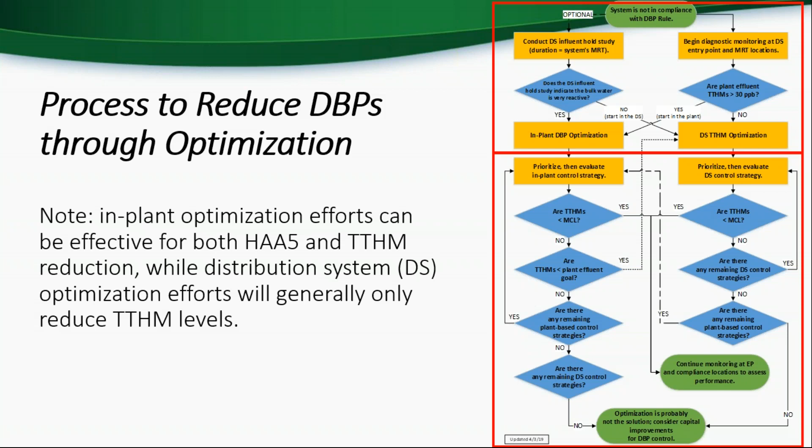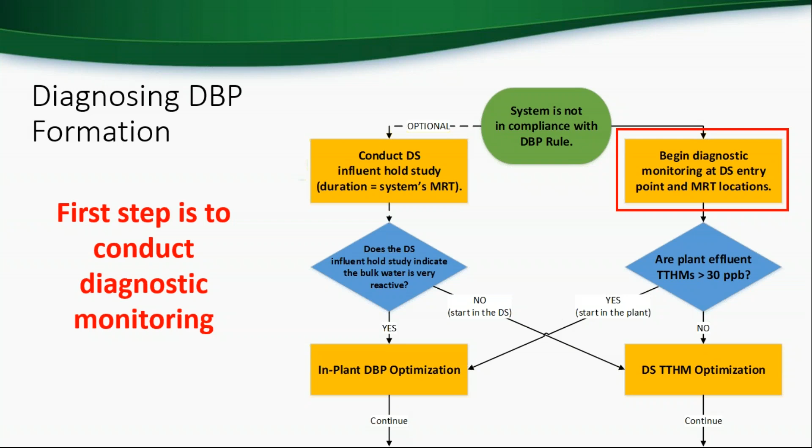The first step in diagnosing DBP formation is to conduct diagnostic monitoring studies. This consists of collecting a DBP sample from the distribution system entry point and the maximum residence time locations to determine where the majority of DBP formation is occurring.

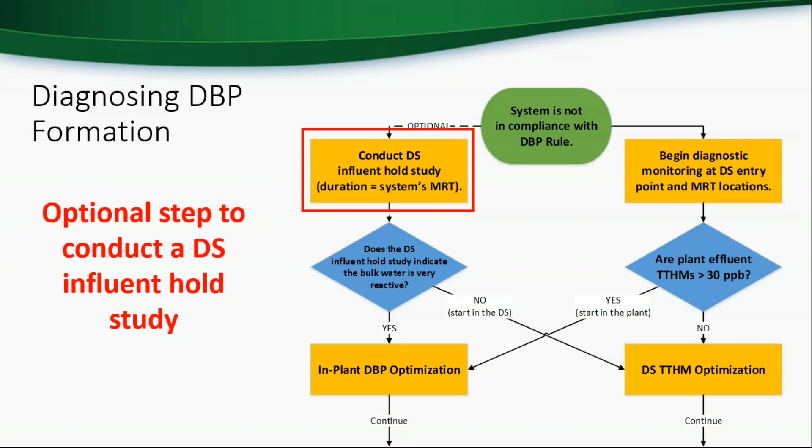In addition to the diagnostic monitoring study, an optional initial step is to conduct a distribution system influent hold study. Conducting this study may provide additional information related to disinfectant stability and DBP formation.

Based on our experience and feedback from state drinking water programs, we suggest that systems initially focus on in-plant optimization approaches if plant effluent THM levels are greater than 30 parts per billion. Similarly, if the plant effluent HAA5 concentration is greater than 20 parts per billion, we suggest they focus on treatment optimization. Keep in mind these are just guidelines and may not apply to all systems.

If a system determines that they need to start with treatment optimization, the primary areas of focus are optimizing their oxidation and disinfection process and DBP precursor removal. These topics will be covered in more detail later in this webinar series.

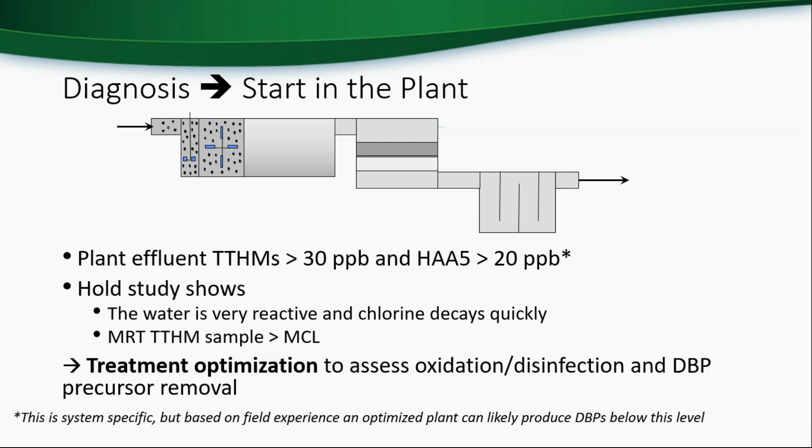The focus of today's webinar is prioritizing DBP optimization control strategies in a water treatment plant. This will include reviewing historical water quality data, in-plant monitoring using a DBP surrogate, and approaches to evaluate the effectiveness of potential control strategies. So this concludes the introduction portion of the webinar.

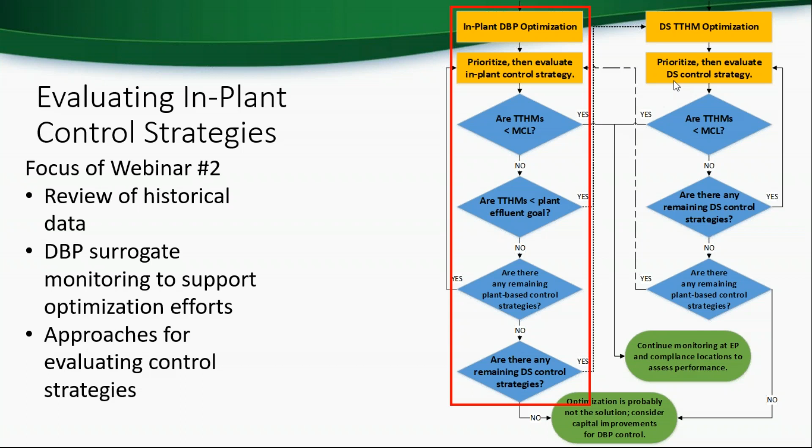Now Allison Dugan from US EPA is going to provide a presentation on how to review historical water quality data to prioritize DBP optimization control strategies in a water treatment plant.

Great, thanks, Matt. As Matt said, today I'm going to talk about the data that are often considered when prioritizing DBP control strategies. And before I get into this, I really want to give some credit to the states of Alabama and Kentucky, who have water systems that provided data that we will be highlighting today. So thank you very much. It provides for some great examples for our discussion.

All right, so before we get into the data, let's talk a little bit about the optimization strategies and where they're applied in the plant. Matt started to talk about this in his presentation, but basically we've got two main strategies we can look at. The first is optimizing oxidation or disinfection in the plant, and often that occurs throughout the plant. In this generic schematic, we're showing a pre-oxidant location, an intermediate disinfectant application, and a post-disinfectant addition application.

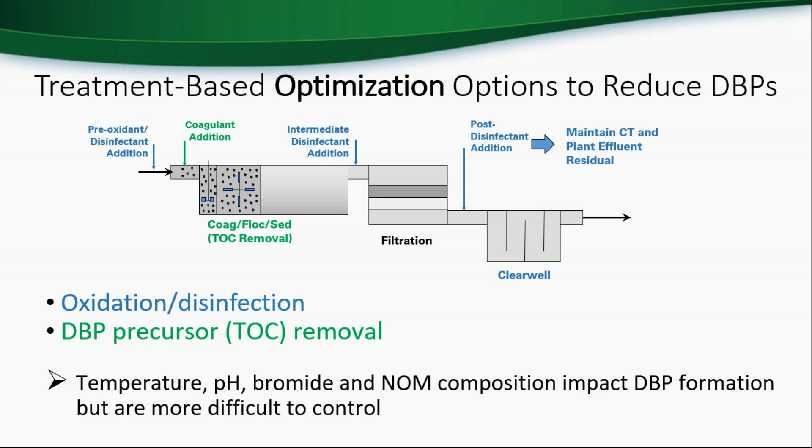And then the other main strategy is optimizing DBP precursor or TOC removal, and this is typically achieved through the coagulation, flocculation, sedimentation process. So really the basic approach that water systems can take is pretty limited, but there are endless combinations of oxidants and coagulant products that a system can use. And so that's where it's important to look at the data and think carefully about the approaches that a system might use.

So along with a variety of treatment options, there are also many unintended consequences that are associated with these two main DBP control strategies, as we've shown here on this table. Here we've listed some of the unintended consequences as well as the two main strategies. And so for some of these, such as reduced disinfection or increased biogrowth, they're primarily a result of optimizing oxidation or disinfection, whereas the unintended consequence related to quantity and quality of sludge is more a result of optimizing TOC removal.

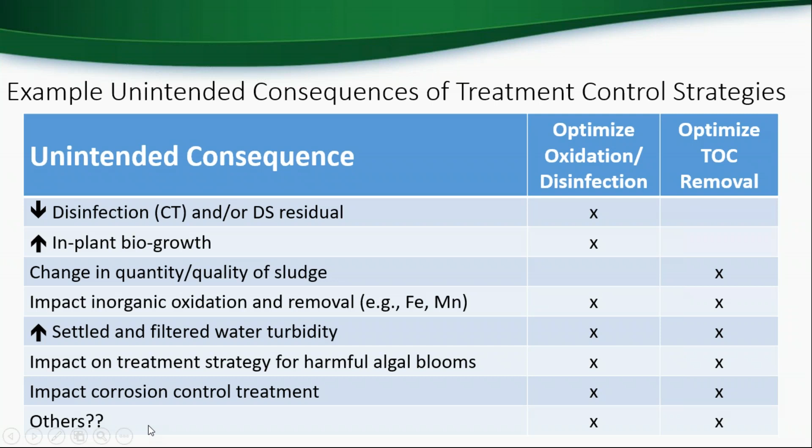But other unintended consequences can occur with either of these strategies, and we've listed some of the more common ones. We've left a row here for others just to emphasize that there's a lot of things that can happen as you go through this process of optimizing a water plant to reduce disinfection byproducts. We're trying to raise awareness here so that it doesn't become a significant operational issue. The bottom line is that they should be considered as much as possible when you're preparing to implement a strategy and also through the historical review, data review process.

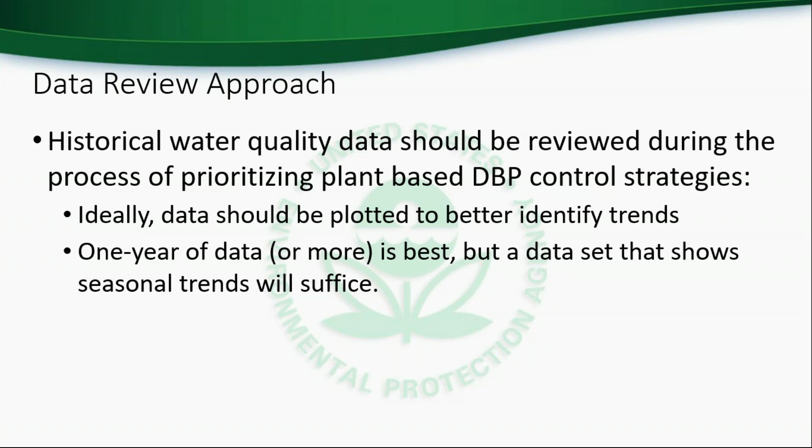So given this background, let's talk about the approach for reviewing historical water quality data in order for us to be better informed as we prioritize the various DBP control strategies. Ideally, the data should be plotted to better identify trends. It's really hard to pick out what's happening trend-wise, especially from tabular data or from an MOR or a daily bench sheet. Ideally, too, you have one year or more of historical data, but a data set that shows seasonal trends will be sufficient for what we're doing here. It really doesn't matter what spreadsheet tool or SCADA you use to generate the data; the important thing is to review it and hopefully look at it in a graphical format.

So we know that water systems generate lots of data, but luckily we can be strategic to some extent with this effort. Specifically, the data to review typically falls into a couple categories. The first is looking at TOC removal related parameters, so that would include raw and treated TOC, coagulant dose and type, and maybe coagulation pH. Then we have the disinfection related parameters, which includes chlorine dose and residual data at all of the applicable locations through the plant, as well as the parameters that a system uses to calculate CT.

And then we also want to look at water quality data related to other treatment objectives or the potential unintended consequences I talked about a few slides ago. That might include settled and finished water turbidity, inorganic parameters a system might be tracking, possibly bromide, iron, manganese, corrosion-related parameters, and algal toxin data, if that's something a system is tracking. There might be other treatment objectives as well that a system is focused on, so information related to that should also be reviewed.

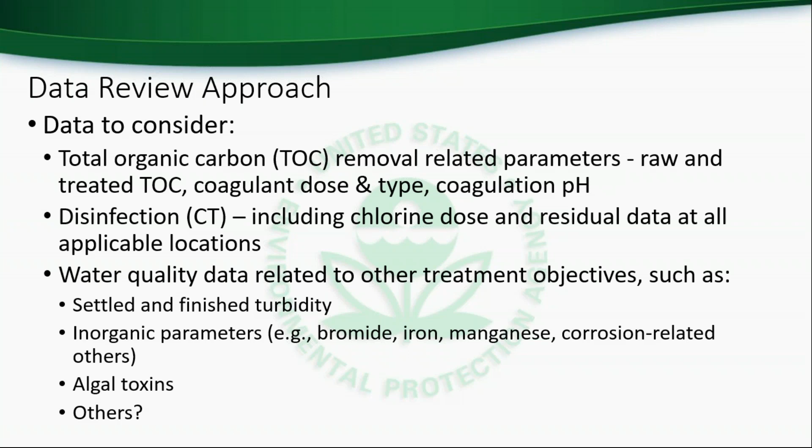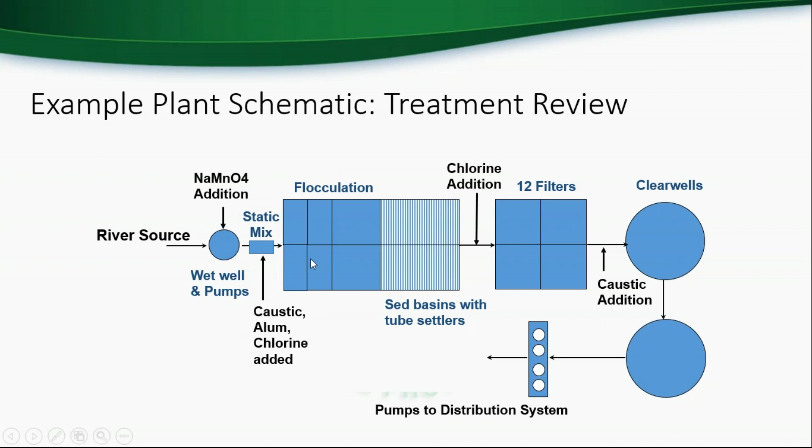In addition to reviewing the overall treatment schematic, it's also important to think about how effectively the system is operating to remove TOC. This is often done through a combination of reviewing historical data and talking with the plant operators. In doing so, you want to first consider: are they even achieving enhanced coagulation? And if so, is this being done intentionally, focused on TOC treatment and removal, or as part of normal turbidity operations? If it's the latter, maybe they're achieving enhanced coagulation, but not necessarily deliberately. If that's the case, it's possible they might be able to remove even more TOC than they currently are.

So regardless, you also want to look at coagulant dose, type, and pH, and think about things like: is the coagulant dose consistent? If it's not and it varies, why is that? Is that because they're changing the coagulant dose for TOC removal or in response to turbidity increases in the raw water, or what's the objective for their coagulation approach?

Also consider whether they're using a coagulant that's effective for TOC removal, and if so, how is that verified? Or are they using a coagulant they've used for years and years, where TOC removal hasn't necessarily been a primary consideration? Some systems also benefit from looking at coagulation pH and whether that's in a desired range for TOC removal. Other systems don't necessarily have to go down that path, but that can definitely be another consideration.

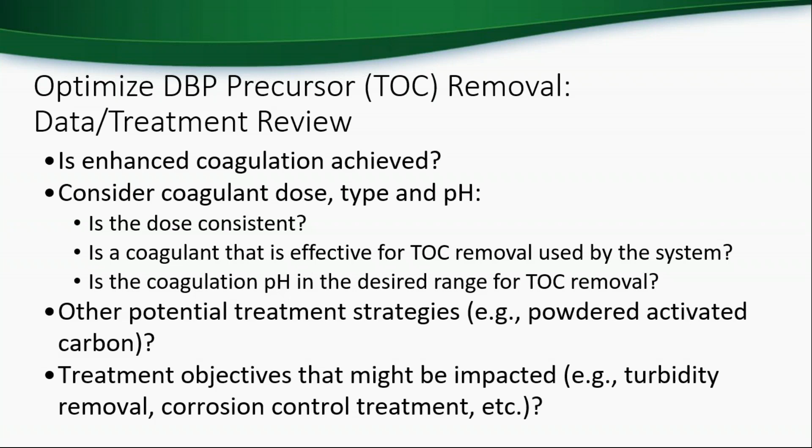Another thing to consider is whether there are other potential treatment strategies a system could use for TOC removal, such as powdered activated carbon or some other carbon application. And of course, in addition to looking at the potential to optimize or improve TOC removal, you want to consider potential unintended consequences related to this strategy, such as changes that might be happening to turbidity removal, corrosion treatment, algal toxin control, and others.

So we also like to look at the coagulant dose to see whether it remains constant or is adjusted. And again, if it's adjusted, what's the treatment objective? Is it turbidity removal or TOC removal?

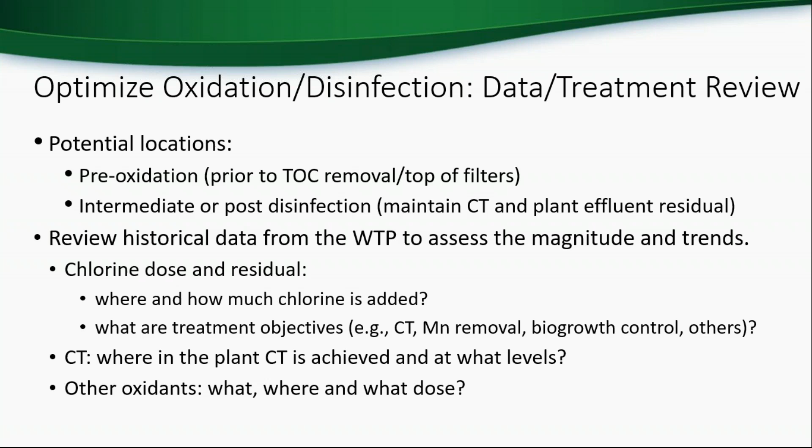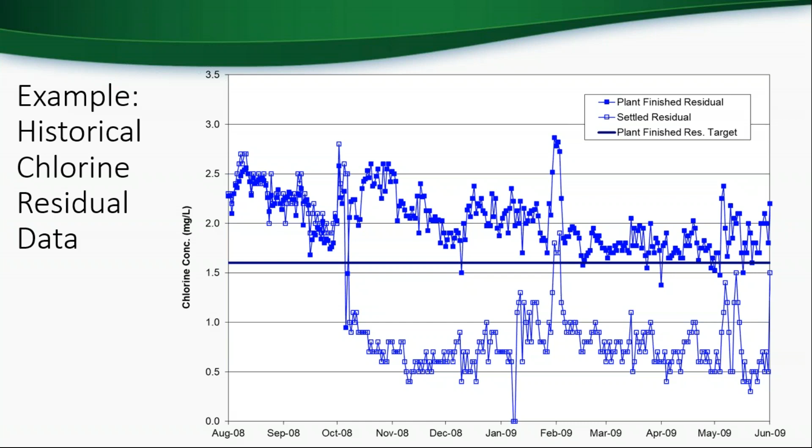The variability in the finished water residual might imply that they'll have to think about why it's so variable from day to day, and whether that variability could be lessened if they pursue optimization, just as they might have less room for error in their chlorine dose and residuals if they go down this path.

Now I want to look at CT, or inactivation ratio, for the example plant. What this is plotting on this axis is the inactivation ratio, which is the measured CT divided by the required CT for that same 10-month period. The system has a goal to provide an inactivation ratio of 1.5, which is the red line on the plot.

This system achieves their overall inactivation ratio, which is the shaded blue portion of the plot, from 3 segments in the plant. In other words, they're measuring chlorine residual, pH, and temperature, which are the parameters needed to calculate CT, at 3 locations through the plant: their sed basin effluent, shown by the green symbols; their filter effluent, the black hollow symbols, which look like a thick black line through parts of the graph; and then at the end of their clear well, shown by these purple stars.

The first step for assessing the potential to implement a DBP control strategy related to optimizing disinfection is to assess the overall amount of CT the system has historically achieved, but also where through the plant they are getting that credit. In our example system, we see that they achieve much of their disinfection credit through their sed basins, again the green line, and their clear well, the purple area.

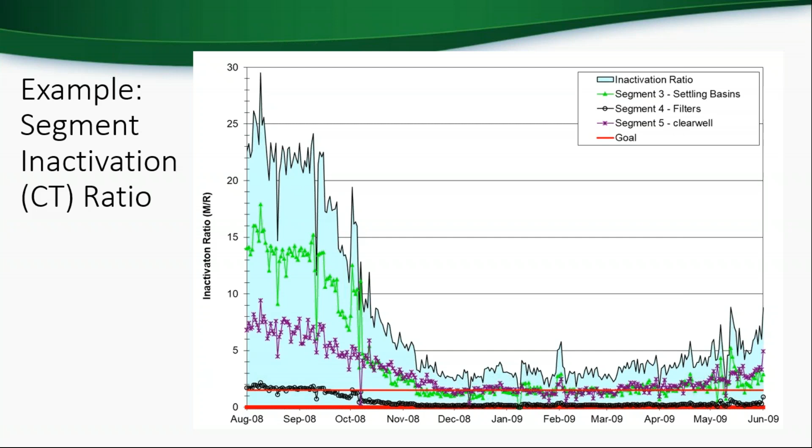The DBP control strategy related to optimizing disinfection can also potentially impact plant effluent residual, both the actual residual leaving the plant and how stable the disinfectant residual is out in the distribution system once it leaves the plant. So it's important not to overlook historical distribution system residual data to assess whether this might be a problem for the system.

In doing so, be sure to consider the minimum residual requirement set by the primacy agency. Again, if you're a water plant, that has to be considered. The impact on DBP formation may not be significant if you're lowering the finished water residual, you may or may not have a significant impact on DBP formation. So that's something to consider, and possibly an argument to just leave the finished water residual at the same level it's always been at.

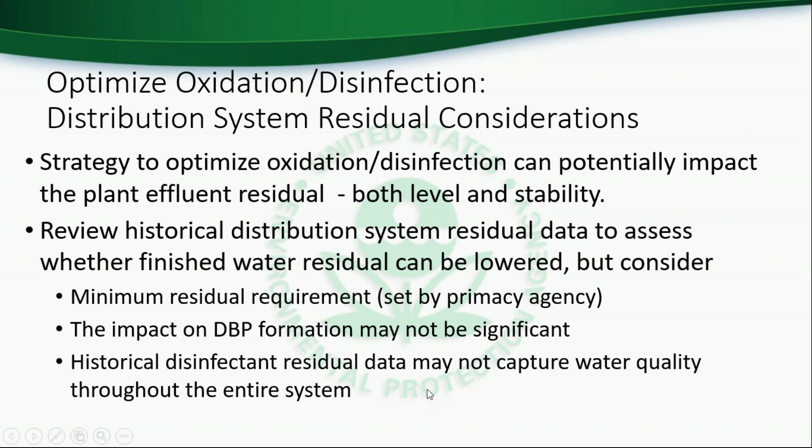Your impact on DBP formation can be assessed to some extent through running a hold study, which we discussed in the first webinar, but it's definitely a consideration how much this is really going to impact DBP formation. And finally, historical disinfectant residual data may not always capture water quality through the entire system. That's something I want to show in the next few slides.

For a different example water system, we have some distribution system chlorine residual data based on regulatory monitoring the system has done. This is within a state that requires a minimum distribution system free chlorine residual of 0.2 milligrams per liter, which would be down in this lower area of the plot.

On this plot, we've included plant effluent residuals from two water plants. This system had two water plants, shown in the green and blue lines. We've also shown the average monthly distribution system residual in pink, and the maximum and minimum residuals shown in black and blue respectively. We've also included a legend for the number of samples the system reported as being below the minimum residual requirement of 0.2 milligrams per liter.

Over the two-year period where we're looking at this data, none of their distribution system residuals were below that level based on their required regulatory monitoring. So overall, the system looks great, and like they might have some room to reduce their finished water chlorine residual.

However, during the same time, the system suspected they had some areas of their distribution system potentially with lower chlorine residuals than what they were routinely monitoring, and they wanted to get a better sense of this. So they conducted what we call investigative sampling, which is really focused on looking at areas in the system that might have high water age and poor water quality.

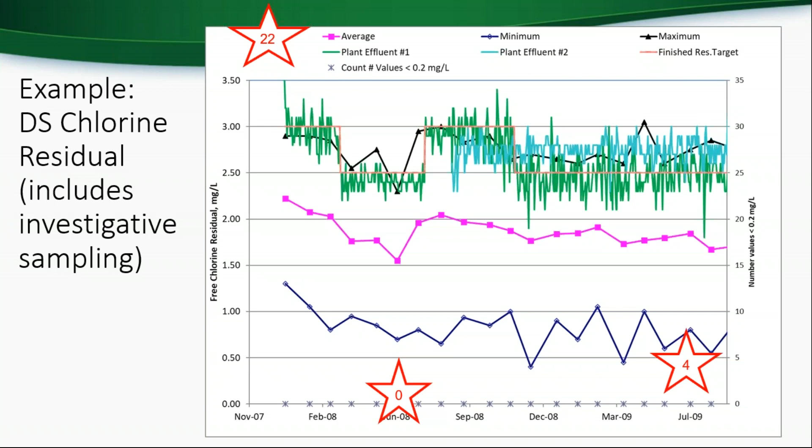So I think the take home here is when you're considering finished water residual and flexibility to lower it, you really want to be confident that the distribution system residual data you have to work with reflects performance across the entire system, and that water quality out in the distribution system will not be compromised.

I know we probably sound a little bit like a broken record with the whole idea of unintended consequences, but I just want to stress that it's really important to think about the impact of these control strategies on other treatment objectives, especially the ones measured by compliance, but also the ones that are maybe more aesthetic considerations.

So we call this simultaneous compliance, which basically means compliance with all of the existing Safe Drinking Water Act regulations. One example of that is turbidity, which might increase due to changing pre-oxidation or enhancing TOC removal and going through that process.

So being aware of that, it's really important to monitor settled and finished water turbidity before and after implementing DBP control strategies to make sure this isn't compromised. And of course, you want to confirm that you're achieving simultaneous compliance with all of the other treatment objectives as you pursue DBP optimization.

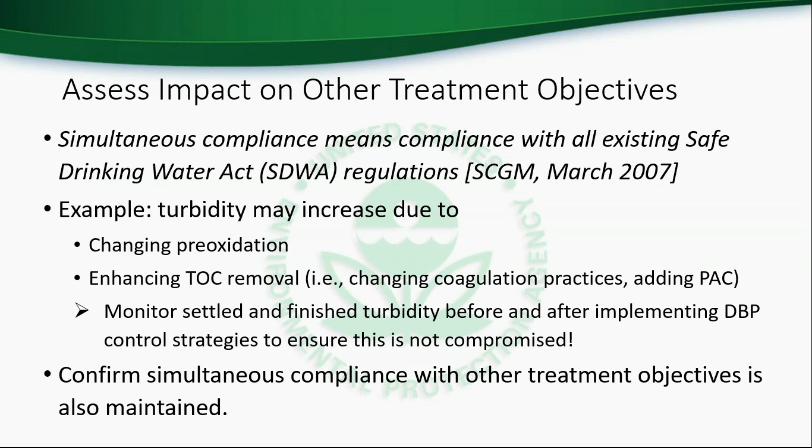So in summary, reviewing historical water quality data is an important step in prioritizing and evaluating control strategies. Water systems do have a lot of data that they generate, but you really want to focus on the data that will support potential DBP control strategies and gaining an understanding of potential unintended consequences.

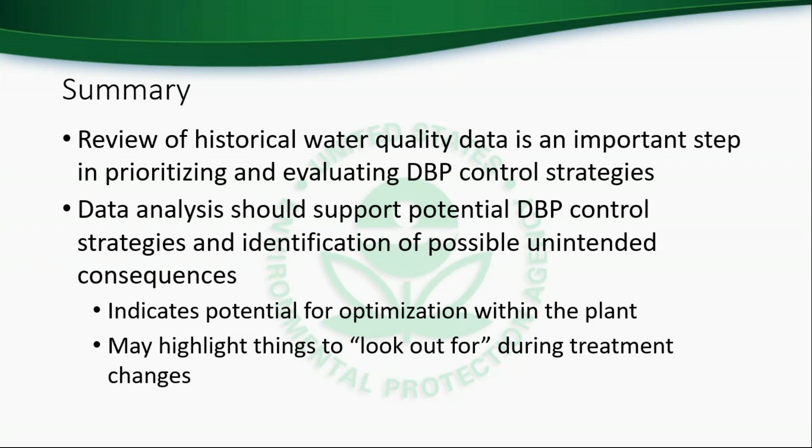Going through this process and having a better understanding of all this will give you a really good idea of the potential for a plant to optimize to reduce DBPs. And it also will likely highlight some things that you want to look out for as treatment changes are made through DBP optimization.

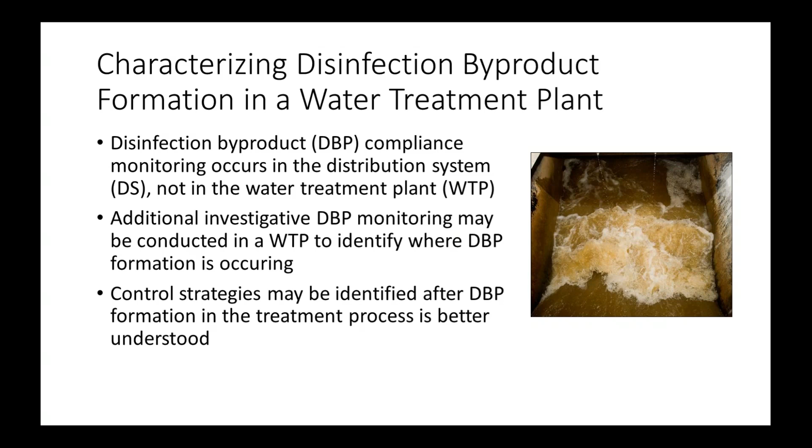All right, so some things to think about are DBP samples - just the logistics of getting those taken, analyzed, and the results available to you or the water system. And typically it's not a very quick turnaround time. It can take as long as a month at some points in time.

That can make the process difficult and long, especially if you're trying to make an operational change. Operators want to see, did this improve my issues, or did it not? And if you're getting certified samples into a lab and then waiting a month to get them back,

it can end up slowing you down significantly. Whereas if you had a surrogate, something that is quick and somewhat easy to produce, you can make changes and assess how you're doing on a much quicker basis. We've got a specific case study that addresses this we'll see in just a moment. Another thing to consider is just the cost.

Certified DBP samples are somewhat costly to have sent off and returned to you, whereas THM Plus, the surrogate that we're going to talk about, is significantly cheaper.

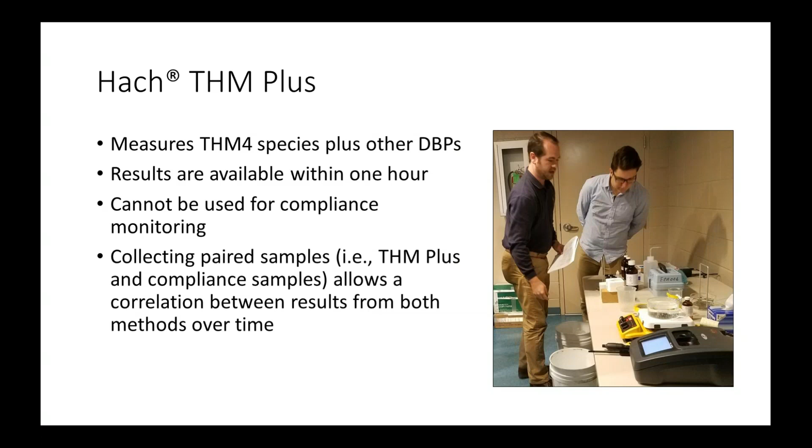We call it a surrogate, so there's going to be problems. It can't be perfect, otherwise that's what we would use for compliance purposes.

What are some of the problems that we face here? The main one is there's multiple interferences, and that can make the data difficult to interpret. But as you get more comfortable with it, you begin to get a feel for what is good data versus bad.

Another important thing to do is to practice, and I'll talk about that a little bit more in a minute. Taking them alongside some certified samples is a good idea, and I would like to stress that again, that is an opportunity to get numbers that you can actually stand on and compare.

How is my technique and method doing on THM Plus? All right, so where does it shine? Where does Hach THM Plus really provide strong data that is useful? For me, I like to use it for profiling, as a comparative process throughout the treatment process, and we'll see that in just a moment on these case studies.

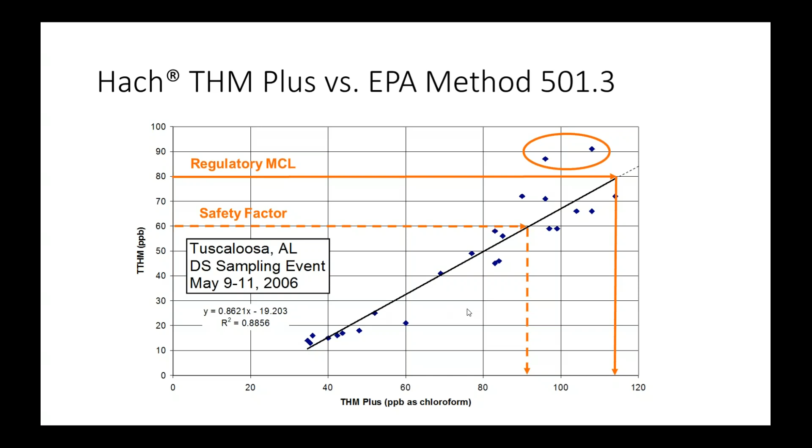So you can see here an R-squared of 19 versus 88. Alabama really showing Arkansas how it's done here, which is, I'm sitting in the middle of Arkansas, so thumbs up for Alabama. All right, so what are some things that we can do to improve our results if we're going to do this sample?

First thing we can do is make sure that we've got chlorine demand-free amber glass bottles. Just make sure your bottles are clean and that you won't have any demand from chlorine in there. The other thing to do is make sure that you get your bottles completely filled, no airspace.

These things are volatile. THMs will come out into the air, and if you have bubbles in there, you're giving it an opportunity to volatilize into the air, and then it won't be a part of your sample.

This is a method that can be done in the field. This picture here was taken at a water treatment plant, and samples were taken immediately and then analyzed. If that's the case, you don't have to worry about the chlorine demand-free amber glass bottles, the no bubbles, and refrigerating. But if you're going to collect these samples and run them at a later time, the samples must be iced and the other precautions taken as well, to make sure that you're not unintentionally providing an opportunity to either increase or lower the concentration that you're going to read at the end of the study.

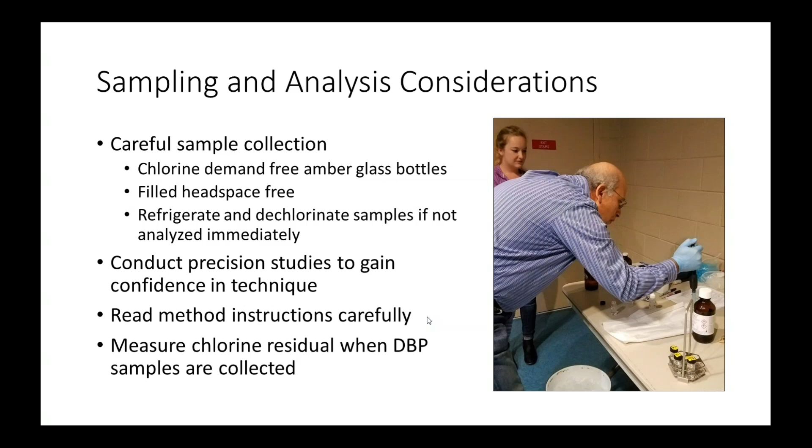Another thing is to measure the chlorine residual when the DBP samples are collected. It's a good practice to just get into the habit of doing. If you're going to take a THM Plus sample, just go ahead and grab a chlorine reading while you're there. A lot of times you can start to correlate higher THM Plus results to higher chlorine residuals and get a feel for how they correlate.

All right, so let's look at a couple of case studies. The first one we'll talk about is a treatment plant with 4 monitoring locations. There were 3 pieces of data taken at each location: haloacetic acids, total trihalomethanes, and free chlorine.

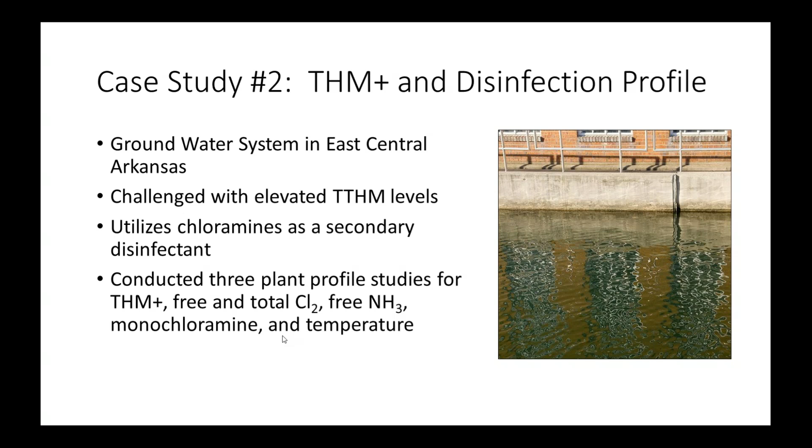So we did 3 plant profile studies, and on each profile we did THM plus, free and total chlorine, free ammonia, monochloramine, and temperature. And then we'll take a look and see what happened throughout this case study. All right, so here is a look at the first profile we did.

And so there's a few things on this just to point out. THM plus is the orange line, and that's the thing that we're most interested in as far as what's going on here. One thing I almost forgot to mention: the filters. They're shown down here at the bottom: filter 1, filter 2, and an average of the filters. Just to point out that's kind of one process that takes up a chunk of the graph, you could just imagine this chunk here kind of being compressed into one thing.

We also monitored monochloramine, which is the purple line, and you see it a little bit here at the beginning, but then it spikes towards the end, which is kind of what you'd expect. And then free ammonia as well.

So this study was conducted on April 21st, and we were able to get back to our office, run the THM plus, and then get those numbers to them and say, let's look at what's going on.

So that was everything with the exception of free chlorine. We put free chlorine on a different graph since it's the one that we're most concerned with in regards to its relation with THM plus, so we'll show it on a graph by itself.

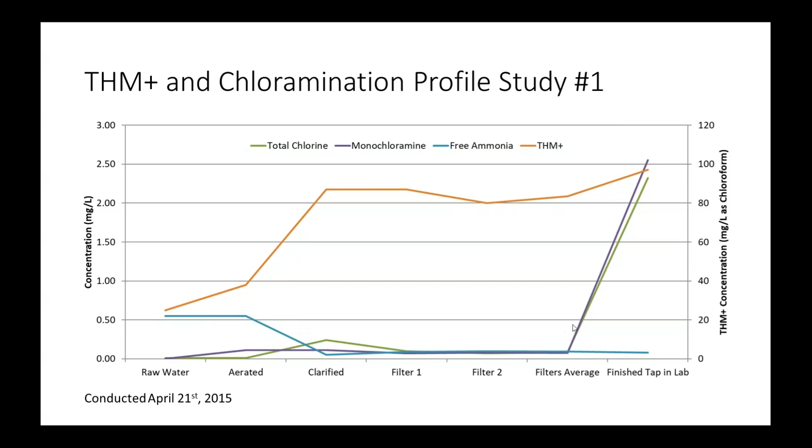One of the things that came up during the visit was that they were not aware they had naturally occurring ammonia in the raw water. You can see on this blue line they had a fair amount of free ammonia in their water, and they were making chloramines anyway.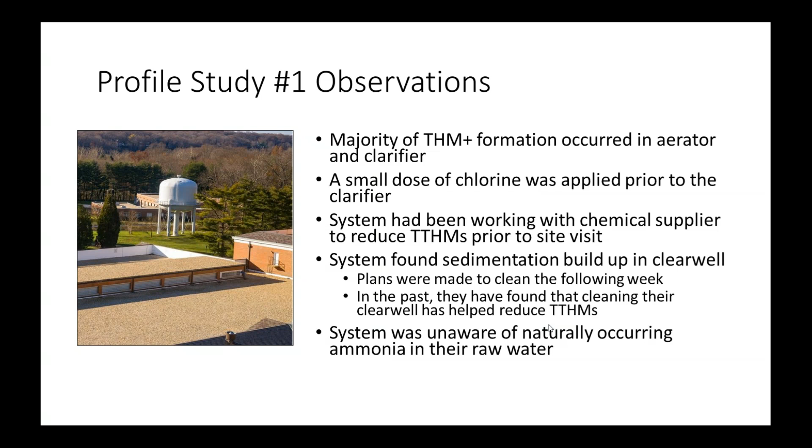So the thought was to try to see if they could utilize some of that naturally occurring ammonia to produce chloramines in the clarifier. This next site visit—the first was on April 21st, and we were back out there on June 3rd after they had tried to make some changes.

You can see now that their free ammonia drops to zero in the clarifier, because they were trying to use it to make monochloramine, with varying success.

One of the things we ran into here and in other parts of Arkansas is that some places with naturally occurring ammonia have it very variable—one day you might have enough to make chloramines from, and the next day you may not.

It also makes it difficult to know what dose to use if that number is fluctuating. It's all based on a ratio, so if that number changes, your chlorine dose changes around it, and if it's not automated, it's a difficult thing to chase.

So on this visit, you can see once again THM Plus is in orange, and by the end of their clarifier they're running close to 140, which is pretty high.

We were there on June 3rd, came back, ran the results, plugged them into the computer, and here's the graph of free chlorine alongside THM Plus. You can see it's pretty condemning as far as where the chlorine is added and where the DBPs are forming—the clarifier was the culprit here.

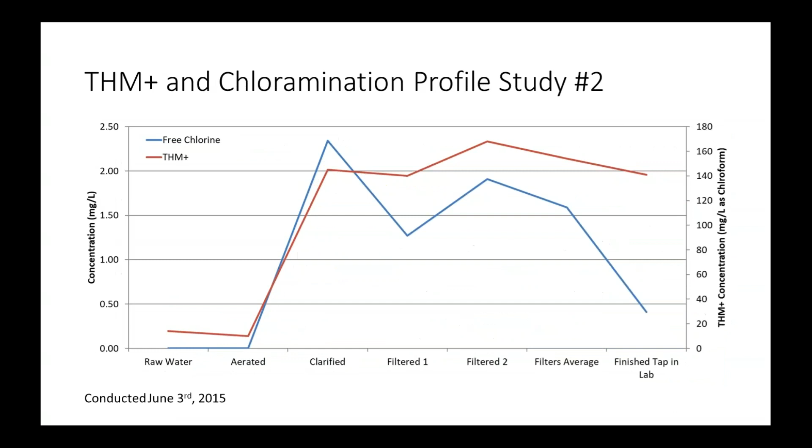This visit is on June 10th. So the first visit was April 21st, then June 3rd, then June 10th. In a month and a half, we've been able to go through a couple of iterations.

At this point, you'll be able to see that our THM Plus leaving the plant was below 20, a vast improvement from what it was. You can see the free ammonia is still getting used up a little bit, but not all of it prior to the clarifier.

One other note I failed to mention earlier: on these graphs, pay attention to the numbers and not so much the scale—they're varying scales. The highest THM Plus shown in this one is 50, and in the last one it was like 160. If they were all on the same scale, it would be hard to distinguish the trends and changes in the lines, but just remember they were running north of 140 one week prior to this.

Here is free chlorine plotted alongside THM Plus, and you can see here a kind of a weird number in the aerator, over 40—there hadn't been any chlorine added at that point in time. What can I say, THM Plus sometimes gives you weird numbers. It does, but it also gives you valuable numbers at times as well.

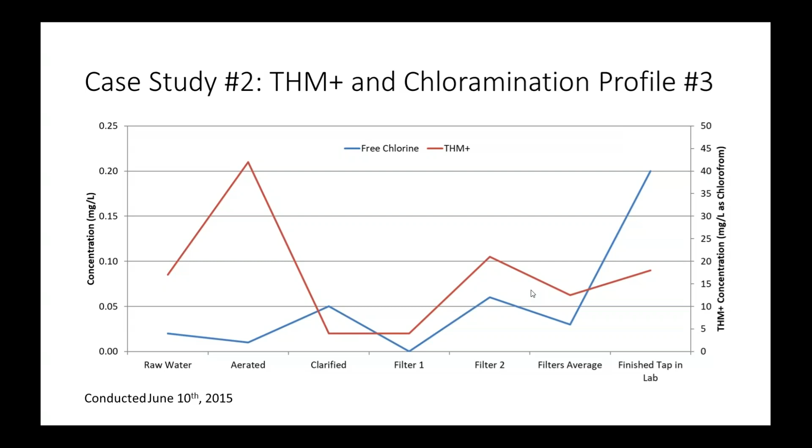So, you know, these might even have been zeros in reality. We were able to, at this particular system, provide fairly quick turnaround times as they implemented operational changes, and THM Plus was the tool that allowed us to do so. It allowed us to identify the problem and say, hey, it looks like we've got a good solution here as well.

I should have clicked onto this slide earlier, but they did optimize their chloramination process and making monochloramine. At this point in time, they were struggling with their residuals because of their experiments with their naturally occurring free ammonia. So we were encouraging them to go through extensive flushing efforts, to which they did, and they were good about making sure they were turning over the water very quickly.

Ultimately, this resulted in them having a significantly lower DBP level leaving their plant than what they had, and they currently are in compliance. It's a good story for this plant. I will say they have had trouble intermittently. So they use permanganate as one of the preoxidants now, and it's more expensive than their chlorine.

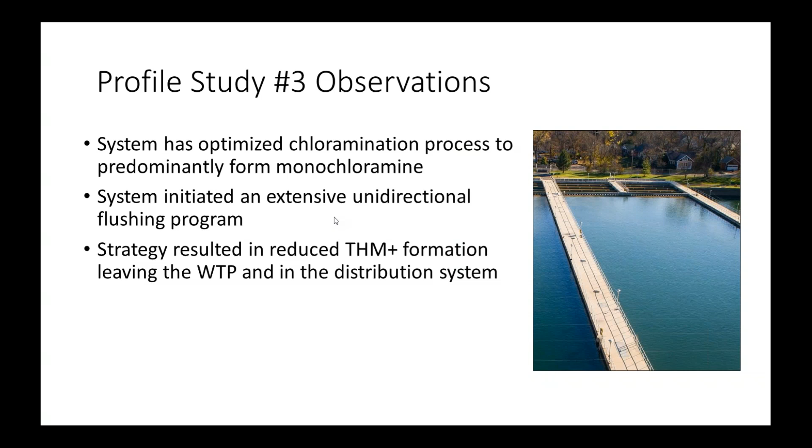As one of the things Allison was talking about earlier, these are unintended consequences. They were getting some oxidation of manganese through the chlorine, and as they reduced it, they lost some of their oxidation of manganese and started to carry over some manganese as well. They can control it with permanganate, however it is more expensive. So they try to toe the line between putting a little bit of chlorine and maybe a little bit of permanganate, and they'll get some elevated numbers and back off the chlorine and bump up the permanganate.

So it's kind of a balancing act for them, but it's a success story as well. In summary, it's not a perfect tool, but it can be very effective at identifying problem areas, especially when you're doing it in a profile. Using it for a profile, it really shines there. It is a lower cost and a quicker turnaround time as well.

It's really beneficial, especially because you can do this method in the field. It's easier to bring it back to a dedicated lab space, but you can do it in the field if you're wanting to give results day of. You can do that, and it can help identify both in-plant monitoring and distribution system monitoring. It can benefit significantly from THM Plus use.

I'll use it for a profile in a plant. I'll also use it for a profile in a distribution system to try to identify, well, looks like this tank might be the issue in a distribution system.

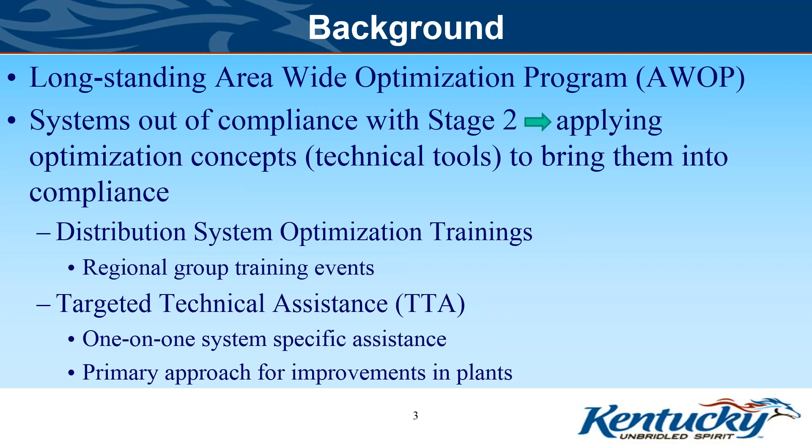Of course, we're dealing with a lot of consecutive systems out of compliance, and so we've done a lot of distribution system optimization trainings. But for the purposes of this presentation, we're going to talk about a lot of the targeted technical assistance that we've provided. TTA is one-on-one system-specific assistance. We're going to talk about our primary approach for improvements in the water plant.

We have several different ways of selecting a system for targeted technical assistance. Sometimes it's just the system giving us a call and saying, I need help, can you come help? But we do have a process that we go through. We do AWOP rankings every year where we go through and come up with a system for ranking the systems based on performance, worst performing to best performing, and try to focus our efforts on those systems that are at the top of that list.

We also look at systems that are in enforcement. We have some systems that will actually put some of these AWOP tools in the corrective action plan that they have submitted in response to an agreed order when they're in enforcement. But even before systems make it to enforcement, we're looking at that enforcement targeting tool total points to see if that's a system that we need to be working with to prevent them from going to enforcement if possible.

Really, our focus right now is looking at parent systems that have consecutive systems out of compliance, even though the parent system is in compliance. And then we have found good use of our time working with multiple systems that may have the same source, because what's working at one system may very well work at another system.

And then really we're working with systems that have a lot to do. There are several optimization concepts that have not been implemented. We have a lot of systems in Kentucky that still pre-chlorinate, and many of these systems can remove additional TOC by making some operational and treatment changes, and have that potential to reduce the DBP formation in the treatment process.

And we do make an effort, and that really is what AWOP is about, is making the best with what you have. So we do work with these systems and start with what they already have in place without making any major treatment changes. We will go in and take a look at the chemicals that they're already feeding and optimizing that process before we change anything, and try to do it at as minimal a cost as possible for that system.

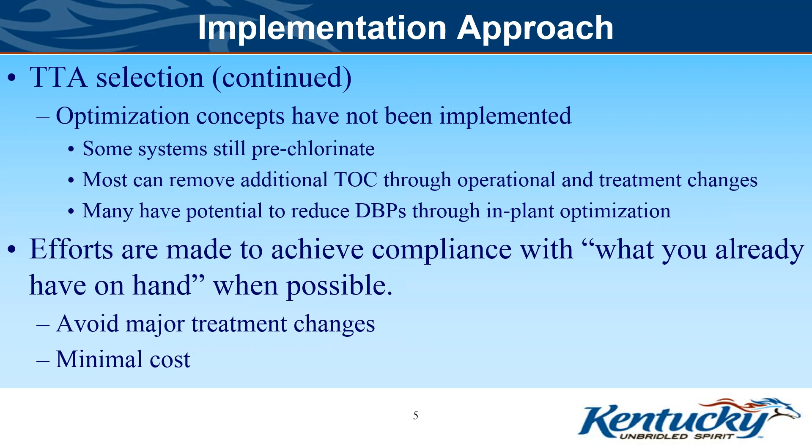And then I'm going to talk about unintended consequences as well, like Allison did on the first presentation, because there are some unintended consequences whenever you're looking at optimization.

When you reduce the CT, or when you move that point of chlorination, you're going to reduce the CT. And in Kentucky, we require a system to get approval before they can move that point of chlorination, because we need to make sure that the adequate CT is going to be met before any application point of chlorine is moved.

A lot of systems report algae growth in their sedimentation basins once they've removed that chlorination from the rapid mix in the plant.

Increased chemical costs. A lot of times systems are feeding a coagulant for optimal turbidity removal, but maybe not taking that extra step for that optimal TOC removal. Or maybe they're not feeding a preoxidant, or they might start feeding a carbon. So all of that may come with some additional chemical costs.

And then we've also run into chemical salespeople and engineering folks that are contract working with these systems. They may not be happy with some of the advice that we're giving them, because they're wanting to keep the system's business. And our objective is helping that system to achieve compliance. Like I said, we do start with what they already have in place. That's not our intent, but that can happen.

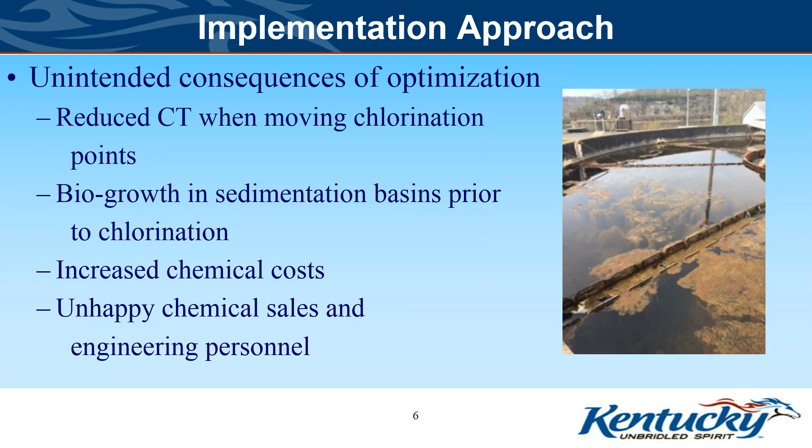And then we run into systems that are reluctant to change. They've always done it this way. Why should we have to change now? It's worked for 30 years. Why should we be doing it differently now?

Systems that have not fed a permanganate, and even some systems that have stopped because they are concerned with pink water. So that's a big hurdle sometimes that we have to overcome. And then operators have to get away from the set it and forget it operation. You really have to be on top of your game, paying attention to what's going on in the treatment process.

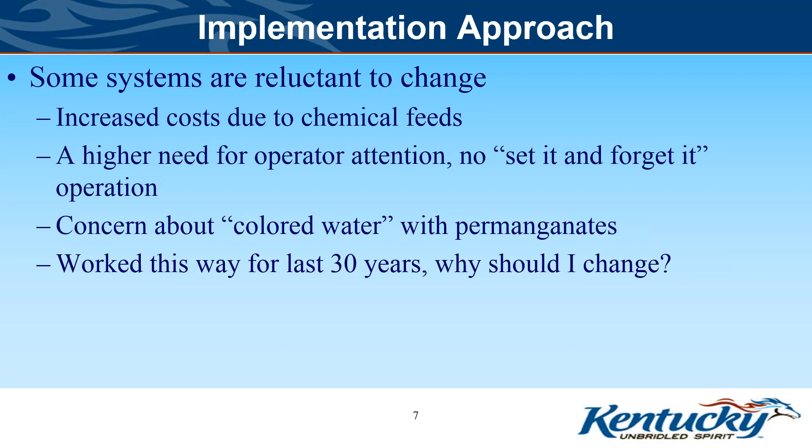So I want to talk here about optimization tools that we utilize. A big part of that is monitoring. Aaron was talking about profiling the plant. That's something that we do too. We go in and we will profile the plant.

We monitor at different stages throughout the plant, and we'll even go on and do some distribution system monitoring. If we're dealing with a consecutive system out of compliance, or if we're dealing with a water system and we have identified the major issue to be in the distribution system, we'll do a more extensive distribution system profile. But when we're profiling the plant, we like to go ahead and grab some distribution system data too to go along with it. Things that we'll monitor for sure are TTHMs, HAA5s, and TOC, and we'll send those off to our lab for analysis.

There is a lag time in that, about 3 or 4 weeks here as well, so we do have to wait for that data to come back. Something that Dave is going to talk more about later in the presentation, I'm going to talk about here in a slide or two, is the use of UV254 as a TOC surrogate. And then we will check chlorine, pH, and temperature. So those are the parameters we're looking at whenever we profile the plant and do some distribution system monitoring.

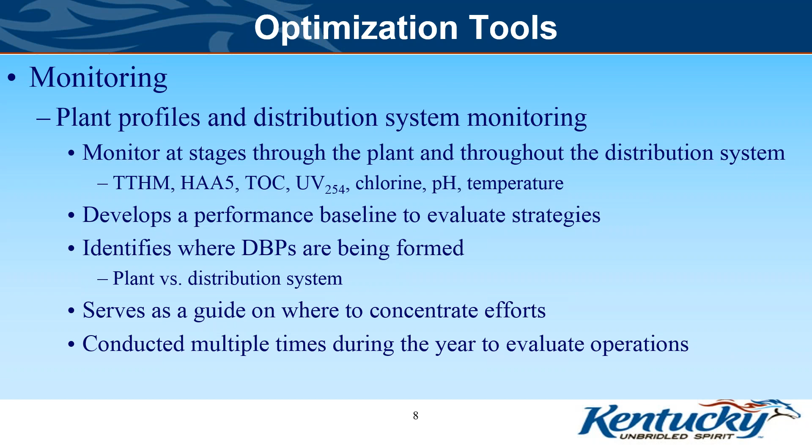If you were on the first webinar, Paul from Pennsylvania gave a good presentation on distribution system influent hold studies. We do these here in Kentucky too, and we'll do these whether we're focusing on the plant or the distribution system because of the valuable information that you gain from it. This study is looking at the DBP formation potential and the chlorine demand.

Allison mentioned it too when she was talking about the stability of the water, and changes that you make can change the stability of the water. Doing this evaluation, this hold study before and after control strategies have been implemented, can really help evaluate the changes in the treated water by seeing if you have affected that reactivity. Very reactive water can suggest inefficient treatment. And then again, it's used to estimate water age in the distribution system.

So I mentioned the UV254 earlier, and this is a tool that David's going to talk more about. He really likes to use this because it's a very good TOC indicator or surrogate. It's a measurement of light absorbed by organic compounds at 254 nanometers. I do want to mention that the results can be impacted by oxidation and interference. In particular, chloramine can interfere, so if a system is using chloramines, that can be an interference here. But really, aside from those impacts, it really is the best surrogate that we've got when we're looking at TOC.

Typically, as that UV254 number trends downward, so do the DBP levels. It's quick, it's easy, you have immediate results. It does require a basic filtration when you're analyzing, and it's reasonable cost.

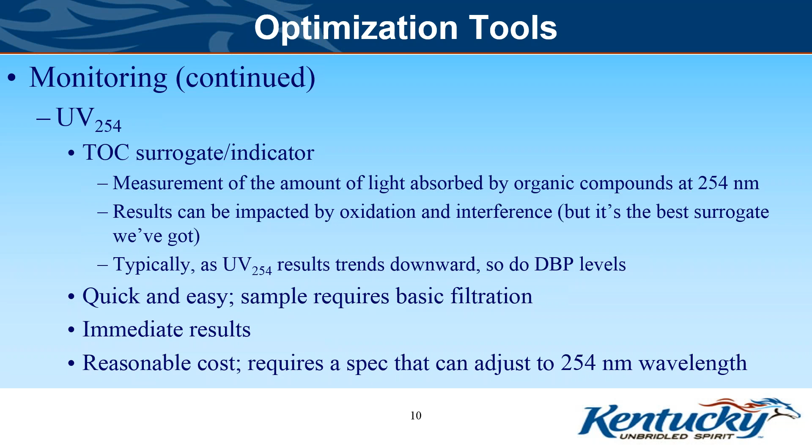Another tool that we use is jar testing. Many times the coagulant's effectiveness is measured by the amount of turbidity that is removed. But when you're looking at DBP formation, you really have to focus on what kind of TOC reduction you're getting.

So what Dave will do in his jar testing is he can run the jar tests, look at different dosages of the coagulants, and then run that UV254 right on the spot to get some data. Run another set of jars, run another set of coagulant, varying dosages or varying types of coagulants, and run the UV254.

And so you can really get a lot done in a short amount of time when you're looking at the coagulation process using the UV254 and jar testing. The jar testing we use to also evaluate the performance of pre-oxidation dosages, and Dave's going to talk more in detail about that when he gets to his part, and evaluating the performance and application point of the powdered activated carbon. And then as a last resort, there is high operator resistance to this, but if all else has failed, if we need to look at pH adjustment, that's something else we can evaluate in the jars.

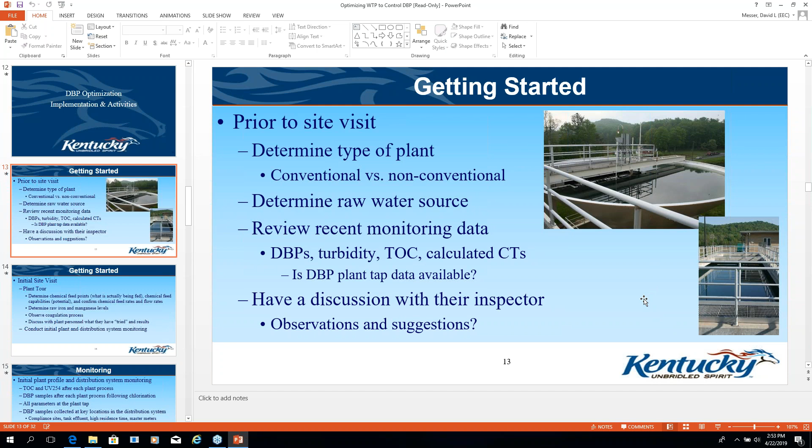And then when I actually go to the facility, I like to just take a general plant tour. Sometimes I've never been in these plants, so I want to see what they're actually doing. I like to look at their chemical feed points. I like to look and see what capabilities they actually have. Can they feed dry powders? Can they feed liquids? And what are they actually feeding? I've been told things, doses that they were using, and when you actually get into the situation and take a close look at it, you find out that maybe they weren't feeding what they thought they were feeding.

So I like to look at all that, and then I like to go in and see what kind of raw iron and manganese levels they have in the raw water. Usually, a lot of the systems I've dealt with were not treating for those. They were using chlorine to oxidize the iron and manganese, and they weren't trying to actually remove them with another preoxidant. I like to take a close look at the coagulation process, see what kind of doses they're using and what the results are, and have a talk with the plant personnel and just ask them what they've been doing, what they've tried to do, and what seemed to work for them, what didn't seem to work for them.

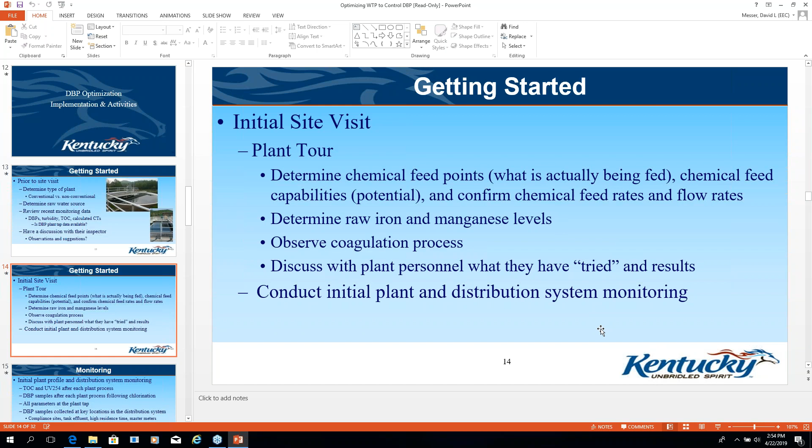And then, if possible, while I'm there, I'll go ahead and start my initial plant and distribution monitoring. Sometimes it'll take a couple of days to do the initial monitoring, especially if the plant's a long way off, but generally I like to get that done to start with. I'll look at the TOC levels through the plant at each process point and maybe a couple of points out in the system. I also like to do the UV254 absorbance measurement after each plant process and out in the system. And I'll pull a DBP sample after each plant process, after it's been chlorinated.

And we'll look at all the plant tap parameters and go out in the distribution system, maybe take a master meter sample or two, maybe some compliance sites. And if operators just point out some areas where they have high residence times on their maps, we may go out there and pull a couple samples initially. We're just trying to determine what the extent of the problem is, what levels we're seeing at different places. And it also gives me a tool to compare our activities against.

Sometimes folks will be hard to convince that something you're doing is working, but if you've got the data to show changes and the effects, it makes things a lot easier.

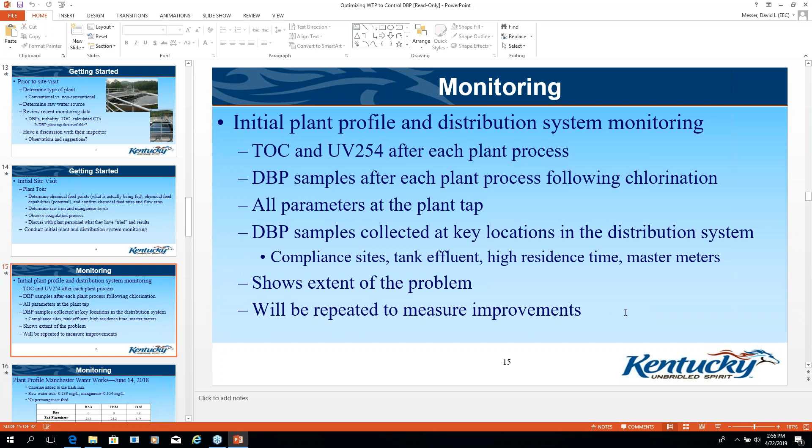I did this profile because a consecutive system, a purchasing system, had been referred to enforcement. The producing system was not out of compliance at the time. Their numbers were on the upper side of the range, but they were in compliance.

I had done some distribution sampling in the purchasing system and found that at the master meter coming to them, some of their numbers were in the 60, 70 range, depending on what time of year I sampled. So I knew the producer was using up most of the limit, for lack of a better word. So I knew we'd need to go back and do some work at the producer to try to get things lined up. The profile data here was simply to demonstrate to the producer that you may be handicapping your purchaser.

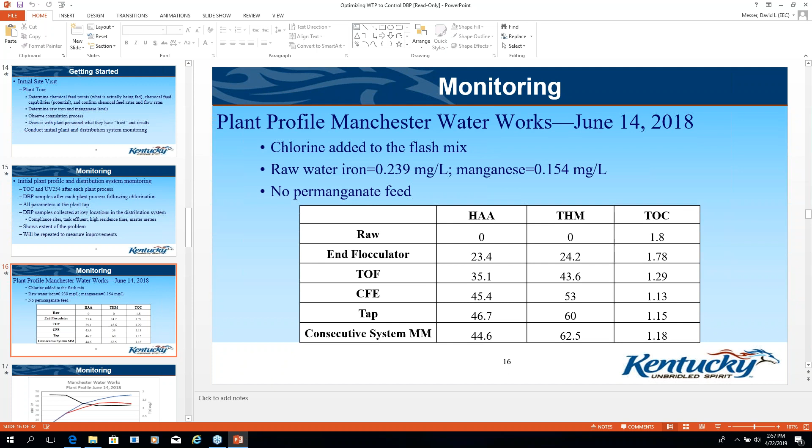So it didn't have a lot of time to generate TTHMs, HAAs, etc. The results indicated what we had found in the distribution sampling, that the plant was a significant contributor to the problem associated with the purchaser's problems there. We did some follow-up sampling in September of that same year, and the TTHMs were running up around 72 at the purchaser's master meter.

Based on this data, the plant started feeding permanganate as a preoxidant. They also reduced the chlorine level. They never did completely eliminate chlorine in the flash, so they were feeding permanganate in a pre-flash, and they were feeding a lower level of chlorine in the flash.

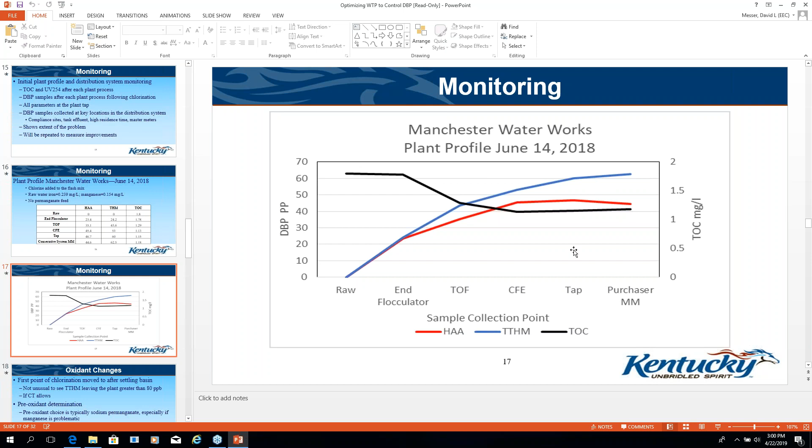As Jackie had mentioned, all those samples were done by the state lab here in Kentucky, and they've supported us in all this monitoring. They seem to do all the samples we want done, so it makes it work a lot better for us.

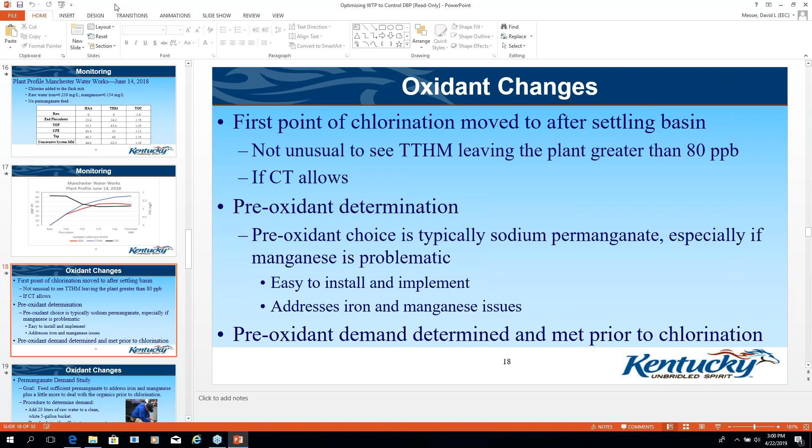Hey David, can I interrupt for one quick second? Can you turn your slideshow into a slideshow? Just start it from right where you're at. Let me find it. Yep, the icon right up at the top, all the way over. One, two, three, four to the right. There's a little icon right there. I'm looking there. Yeah, that's the one. Perfect, there you go. Sorry about that. It's all good. Let me get back to where I was at.

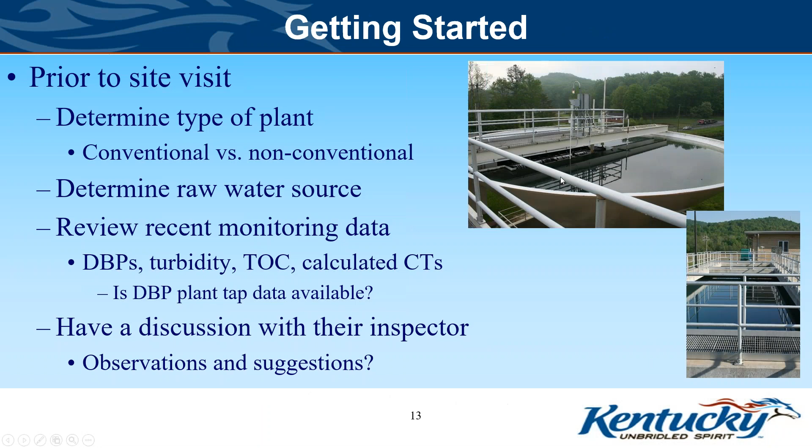Generally, some of the things we've been doing, a lot of our systems are using chlorine in the flash mix, and we've been trying to get that point of chlorination moved, if possible, because based on plant profiles, we've seen a lot of the DBP formation coming in the plant in the sed basins. It seems like it's just difficult to get them as low as we'd like to see them without doing something.

So we like to take a look at other preoxidants. Typically, for the systems I've been working with, that preoxidant of choice has been sodium permanganate or potassium permanganate. Generally, it's fairly easy for us to implement, and I like the fact that it addresses the iron and manganese that's in some of the raw water. To do that, we'll go through a demand test.

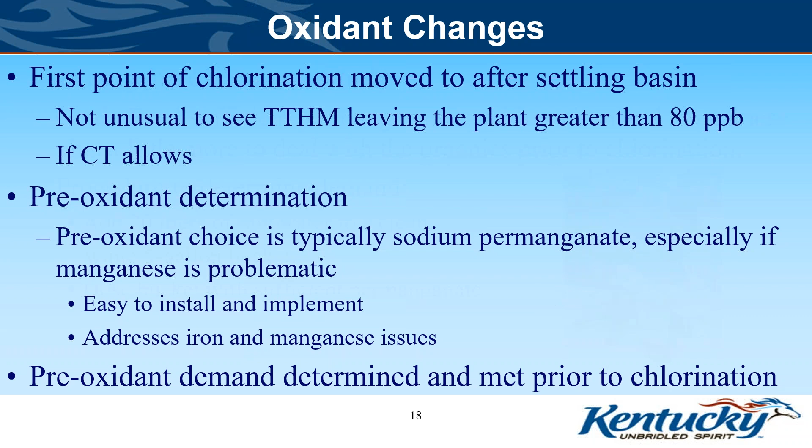Before we actually change things, the way I like to do a demand test—I know there's jar testing procedures you could do—but I want to find out how much permanganate I need to address the iron and manganese, plus I'd like to add a little more to address organics prior to actually introducing the chlorine to the system. So the way I tend to do it is I'll take a clean white bucket.

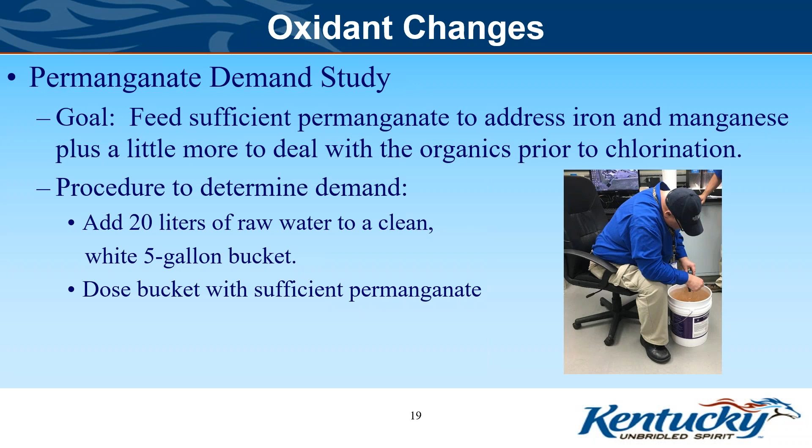I'll add about 20 liters of raw water to it, and then I'll dose that bucket with sufficient permanganate to achieve the results I'm looking for. The results I tend to look for are: I'll feed a sufficient amount to address the iron, which is about a ratio of 0.84 to 1. I'll feed enough to address the manganese, which is about a 1.71 to 1 ratio. I just usually use a 1 to 1 and 2 to 1, makes it pretty simple. Then I'll add some additional permanganate, maybe a half a part or so, to try to address the organics that are in there.

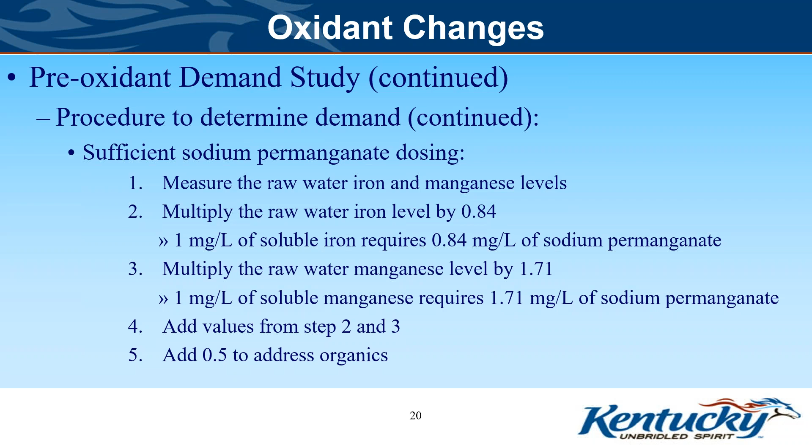And then I'll mix the bucket up real good, and then I'll just sit and observe it. If that pink color goes away in less than 30 minutes, I like to add additional permanganate. I want it to stay a pink color in the bucket for at least 30 minutes. That's just something that, through observation, seems to work for me, at least for the water here in Kentucky that I've had to deal with.

In cases where I don't really have a basin or anything to get my holding, if I can keep that 30-minute time period acceptable, I'll do that, or I'll look at a conventional plant with a couple of flocculators, and I'll have them add sufficient permanganate to keep the water a pink color to the end of the first flocculator. So as long as it's starting to disappear or has disappeared at the beginning of the second flocculator in the series, then generally that dose tends to work for me.

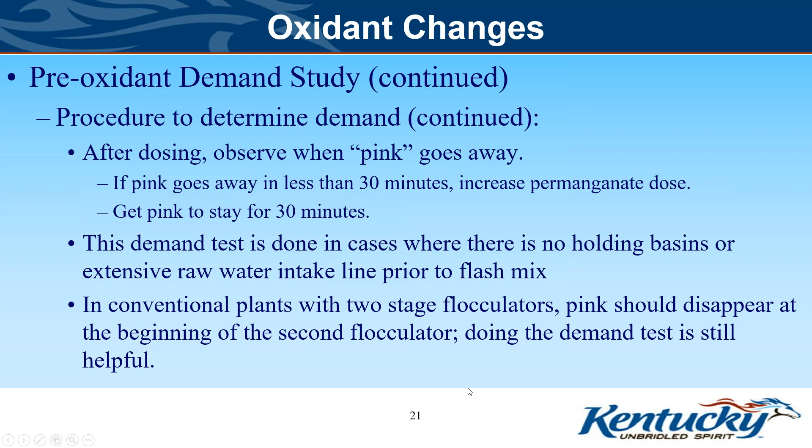It'll convince the operator too that he's probably not going to see any pink water go through. If he's got 2 or 3 hours holding time through his settling basins, and you're showing him that the water will change color and the pink will be gone in 30 minutes, generally it's comforting to them, and they'll go ahead and let you do it or work with you and get it done. The same goes for letting the color disappear after the first flocculator.

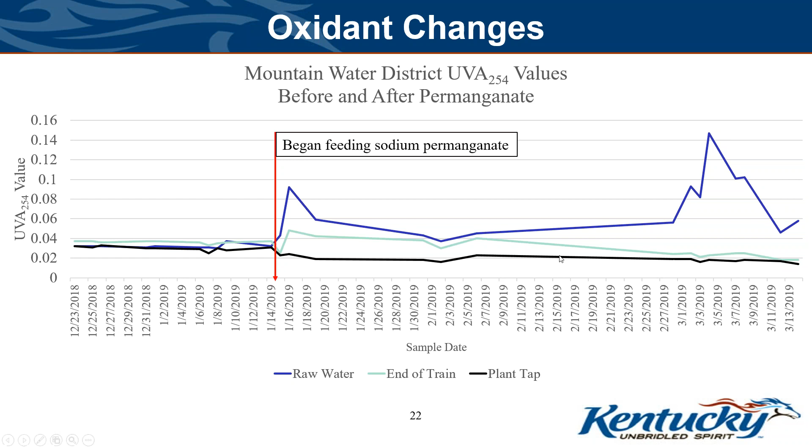So it appeared that could be another impact as far as the UV 254 reading we were getting at the end of the train. Yeah, it's just interesting, and I'm not real sure yet how that's going to work.

But the sampling that came out of this system, the latest sampling, they were in the mid-20s now coming out of the plant with the DBPs, which were significantly below what they were. I think they were referred to enforcement, and I think this last quarter they were in compliance, if I remember correctly. So we're going to stay on this course through the summer and into the fall, and see if this holds steady through that time period, which we think it will.

And our jar testing, we do the jar testing to try to optimize the coagulation with both goals of turbidity as well as organics removal. Historically, most of our plants have not really evaluated organics removal in a system at their coagulation point.

They were just running everything off turbidity. And what we have found is the UV 254 absorbance number tends to trend down as our organics tend to trend down. So it seems like it's a real good indicator - when I'm jar testing or working in the plant, if I can get the UV 254 absorbance number to go down, then generally my results will look better. And when I'm jar testing, I usually start with the system's product and the dose rate based on what I've found historically.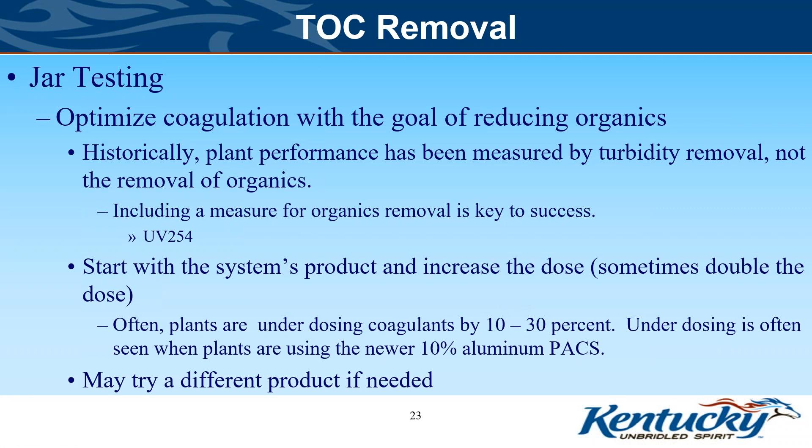And in some cases we do try different products if whatever we've got is just not working. Folks will be glad to give you a sample and let you try it somewhere.

All right, in powdered activated carbon - some of our systems are using some powdered activated carbon, most are not. Just based on experience, there is a significant difference between the various powdered activated carbons. Most of the purchasers at a lot of plants want to buy whatever's cheapest. They want to bid it, and whatever comes in cheapest, that's what you'll use. This is not a very good practice.

You need to jar test the carbons. You need to do plant trials, and you need to determine which is the best performing product. And you also need to take a look at the application point.

The recent example, when we were trying to remove geosmin, which is not the same as the TOC, but it's a good example - the plant was using a cheap, I call it generic carbon, that you'll see in a lot of facilities. They were getting about 50% removal of the geosmin coming into the raw water. We did some tests with jars, did some filtration, sent the samples off. We were able to get that up to 70-75% removal just by selecting a different carbon, different grind, different source.

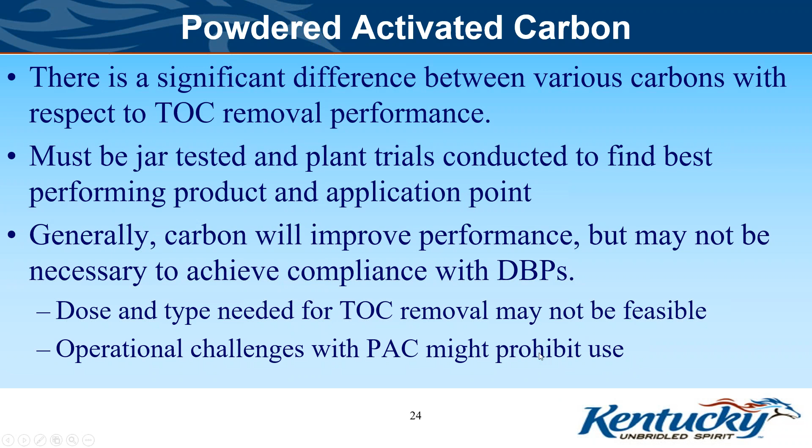Either way, it gets fairly expensive, and you have to use a lot of product.

All right, we've got a case study here for the Martin County Water District. Some background: they were referred to enforcement for disinfection byproduct violations. They had attended a distribution system optimization training. They were feeding a low dose of a 10% aluminum coagulant and a polyacrylamide to help with flocculation of the coagulant.

They were pre-chlorinating with bleach in the center well of the clarifier. They had the capability of feeding liquid carbon and sodium permanganate, but they were not using either one. And they had a very active citizens group in the community.

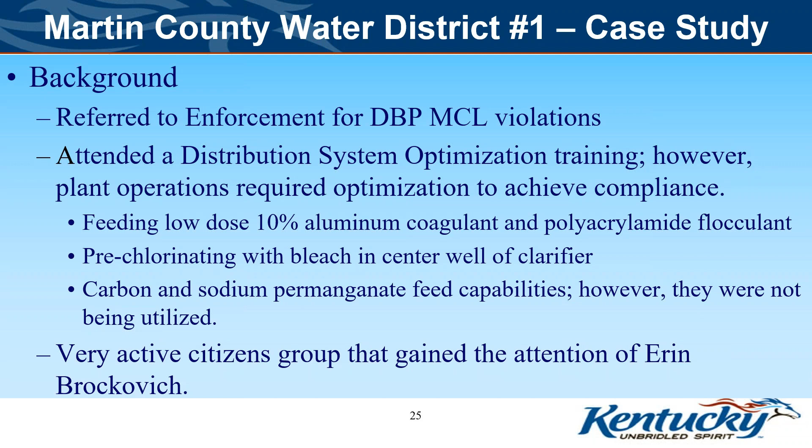Through Facebook and social media, they had gotten a hold of Erin Brockovich, and she'd done a little video for them and sent her expert water treater down to take a look at the situation. So the atmosphere was not the best up there, but they thought everybody was out to get them.

Here's a picture of what I think they're called hydrotreaters that was at Martin County Water. You can see the top of the tube settlers, and the troughs come out like a wagon wheel spoke design. I wanted to note this picture because when we talk about the chlorination ring, we actually made a little ring around that center well, laid it on top of the troughs, and drilled holes in it over each trough, so you'll have a visual of what we did.

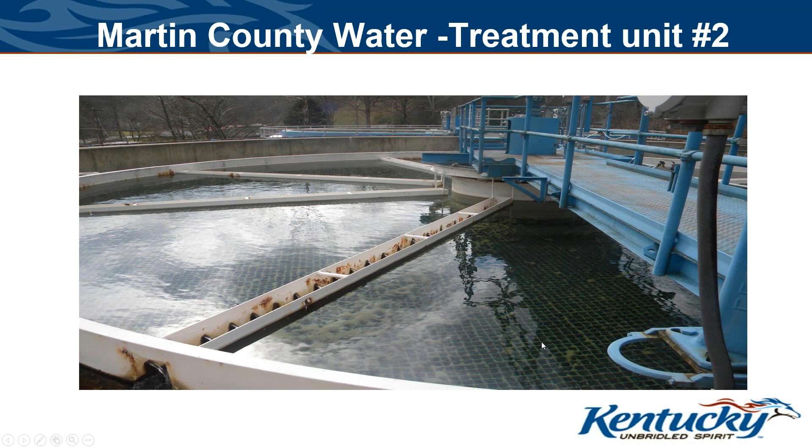But the water didn't look too bad. The top of the filter, or the top of the cone, wasn't awful.

When we got there, we took a look at the CT times to see if we could move that point of chlorination somewhere beyond the center well of the clarifier. We did plant profiles at various points through the system, tested iron and manganese in the raw water, and jar tested for coagulant feed rates and effectiveness.

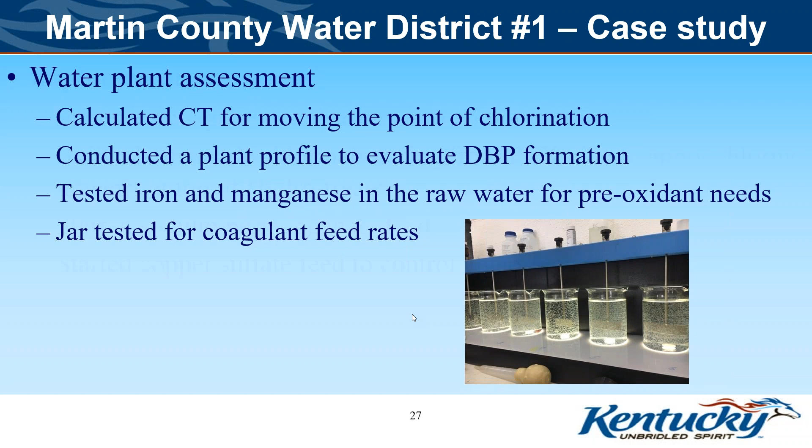When we got all that work done, we found that we needed to increase the coagulant feed from about 18 parts up to 36 parts.

And we built that homemade chlorination ring. The operator actually built it after we sat around and discussed what was necessary and what we wanted to achieve. He just went and got some PEX pipe, the kind used in home plumbing, and made a ring out of it. We took a drill and drilled some holes in it to match the location of the weirs, laid it on top of the hydrotreater, and started pushing bleach through the ring into the troughs.

We started feeding sodium permanganate, and eventually we started feeding copper sulfate to assist with algae control and taste and odor.

When we switched over and pulled it out of the center well, we had a couple of problems. One is, within 2 to 3 days, they were calling and saying they were seeing a scum forming on top of their clarifiers, which turned out to be algae.

They were kind of in panic mode, and as we were discussing it, they said, well, what about just turning that ring a little bit and putting the chlorine on the surface of the water? They did that, and the little scum just disappeared.

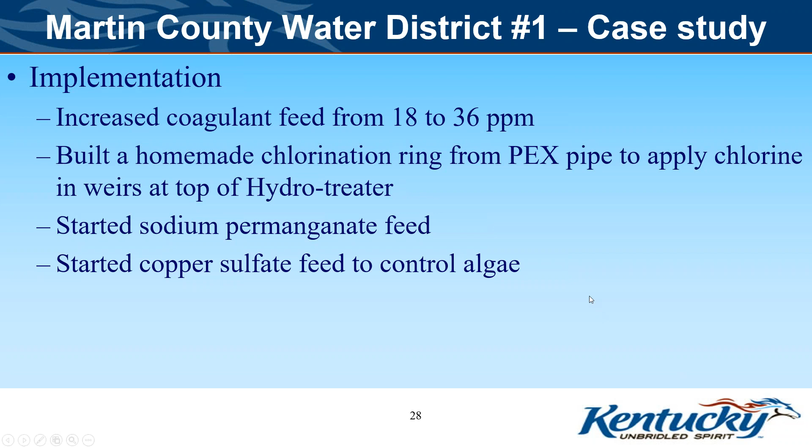What we ended up doing was adding a little polyphosphate. We got a hold of one of the manufacturer's engineering staff and told them what we were having. They agreed that the polyphosphate would be great to sequester the calcium. So we treated the water used to push the chlorine out with about 1 part of a polyphosphate. That addressed the precipitation and the plugging, and everything seems to be going fairly decently there.

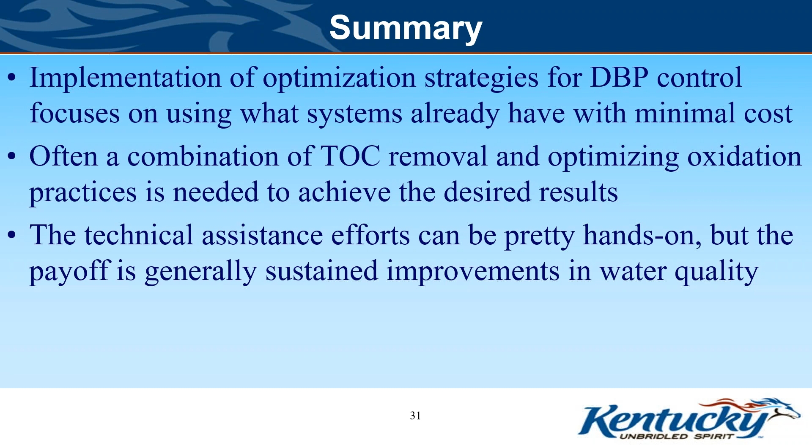And I guess the summarization, we try to look at the resources facilities have on site, so we can do what we need to do with minimum cost. We take a look at the TOC removal practices and the optimization practice that we need to apply to achieve the results. I found that directed technical assistance, one-on-one, seems to provide some good results, at least for us. So I guess that's the end of our little presentation, but I'll pass it back to Allison.